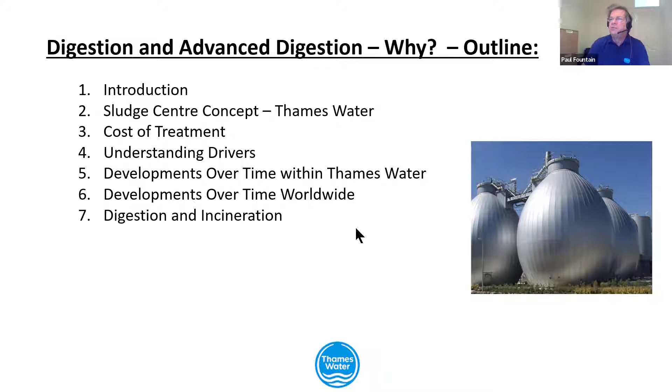We are in the United Kingdom, and a little bit about the United Kingdom. The United Kingdom was divided up into river basins, effectively. And so Thames Water are this river basin down here, which is the London region. All of the water that flows into the Thames River is in our area. There are 13 areas around the United Kingdom. We serve about 15 million customers in both water supply and sewage treatment, like you do. We have 350 sewage treatment plants. Many of them are very small.

And the very small ones then send their biosolids, their sludge, into 30 sludge treatment centers where we treat and process all of the sludge. We treat just over 1,000 dry tons of sludge a day, most of it going to digestion, but a small amount of it going to incineration as well. And last year, we generated 313 gigawatt hours of electricity, plus useful heat. This year, it's more like 350 gigawatt hours. We're the largest producer of renewable energy in the London area.

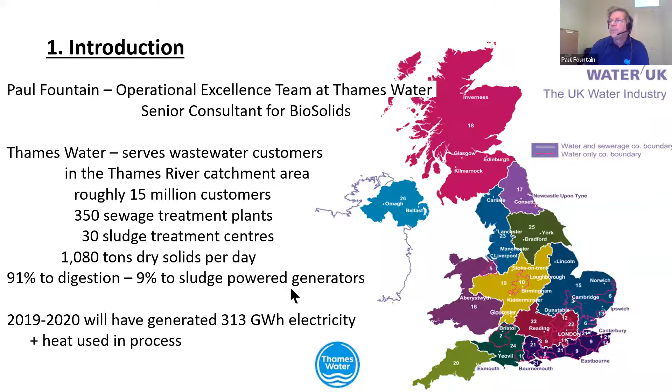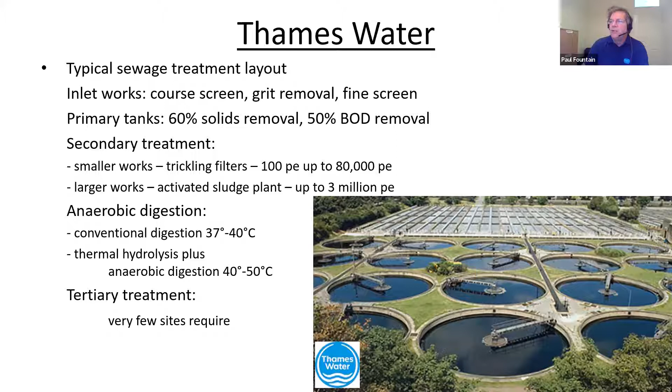Most of our treatment plants have coarse screen inlet works, grit removal, fine screens, followed by primary tanks. We think primary tanks are a very good way to do things because the quality of primary sludge is much better than secondary sludge. On smaller treatment works, we would follow that with trickling filters. On large treatment works, we follow that with activated sludge. This is a picture of Mogden, which is our second largest sewage treatment plant. And then we generally follow that by anaerobic digestion and then tertiary treatment where it's required. Not many sites have tertiary treatment, but where it is specific, then we do tertiary treatment. So a little bit about our sludge treatment concept, how we manage sludge sites.

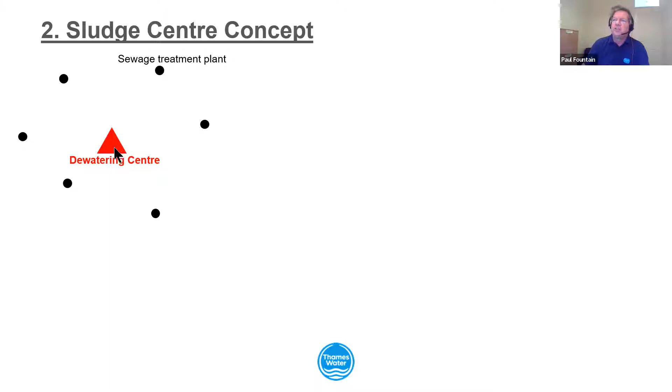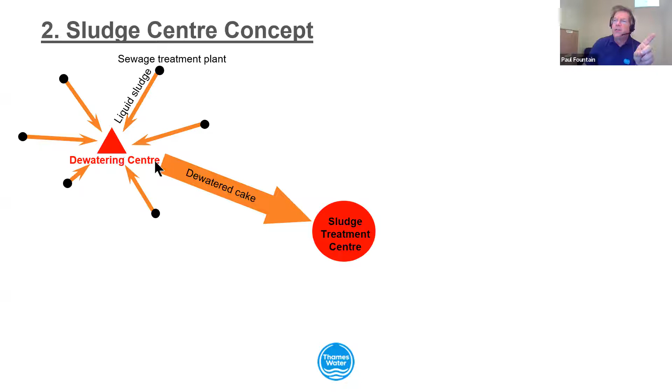So we will have a series of small treatment works that will send their sludge into a dewatering center. They will send it as liquid sludge, tanker it in into the dewatering center. From there, it's dewatered and is sent as cake to a centralized sludge treatment center. So out here, you just have the dewatering, and then in here, you have the sludge treatment. And there may be multiple of these around that are sending in cake, but you can also have liquid coming in from the more

local sites. Transporting sludge is a very expensive operation. So you want to reduce the amount of water in it so that you can transport it more economically. And then the digested cake, the treated cake, we recycle the majority of it. We recycle back to farmers' fields, not exclusively. We'll talk about that in a little while.

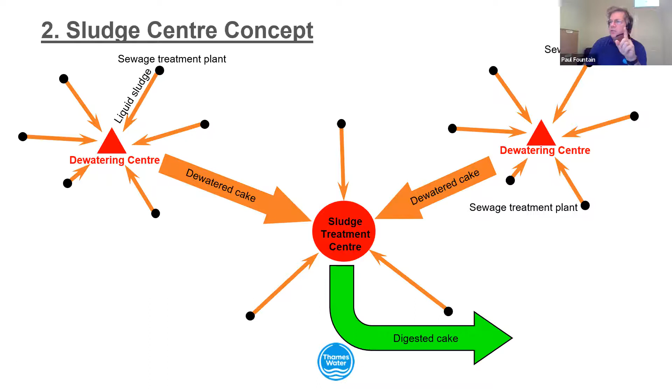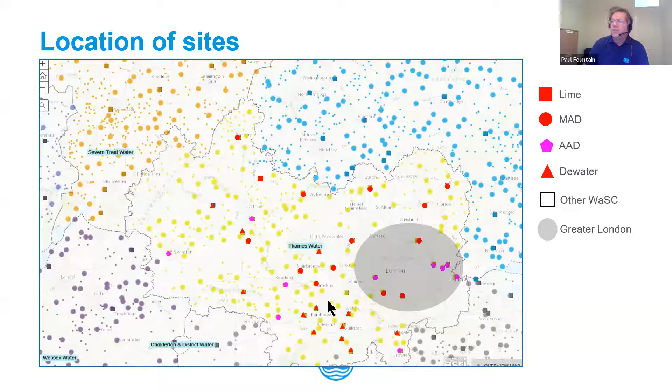So here, all of the very small dots are our satellite sites, and then the triangles are the dewatering centers, and then the red dots. So they're distributed all over. This is the London area where we have some particularly large digestion sites, and then these are the ones spread through the rest of the provinces. So we have a whole network of sludge treatment.

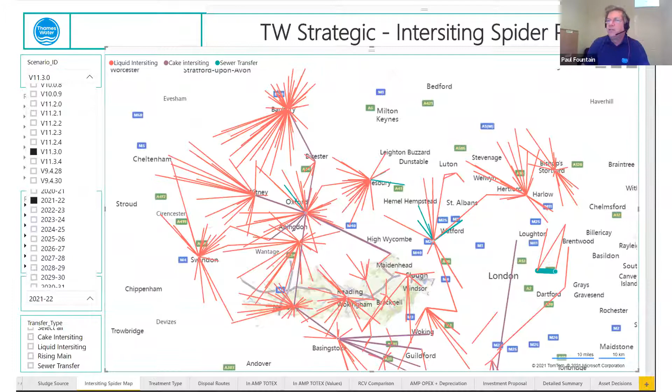So at a sludge treatment center, Basingstoke is our newest sludge treatment center. We have the facility for liquid sludge coming in from the area. We have processing for the indigenous sludge from the site. All of that then feeds pre-THP dewatering. We have a cake silo where our indigenous cake, the liquid imports are all dewatered and go into there, but

we also have a cake import facility over here where trucks can bring cake in, where it is processed in THP, thermal hydrolysis. We pressure cook the sludge so that it digests better and produces more gas. The digesters, you'll see in a minute, they're just behind me.

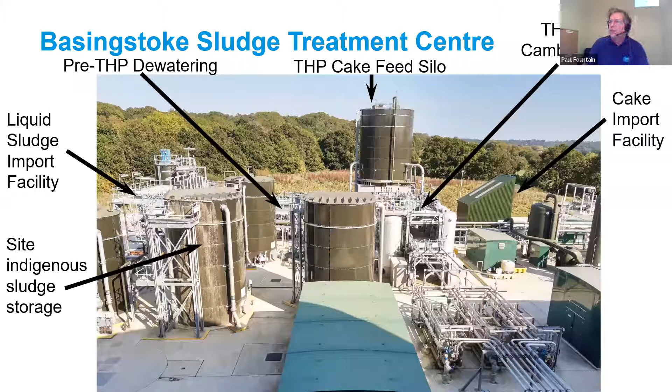So here is the sludge treatment center. This is the main sewage treatment plant, the inlet, the primary tanks, the activated sludge plant, the final tanks. And then everything is sent over for digestion. These three are the digesters. Then we have a dewatering building, and a liquor treatment plant before the liquors are sent back to the treatment

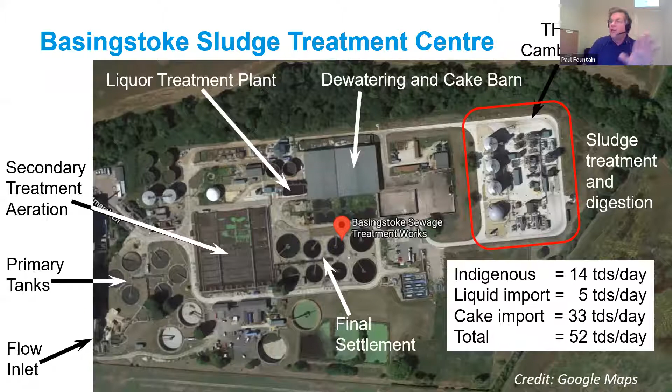works. Indigenous sludge is about 14 ton a day. The liquid imports are about 5 ton dry solids per day, and imported cake, the majority is coming in as cake, is about 33 ton a day, giving us a total just over 50 ton a day. This is not at all one of our larger sites, but it is a new site and quite well laid out, so it makes a very good example.

As we zoom in, you can see here's our liquid imports coming in. These are the pre-THP dewatering belts going in. This is cake import coming in, THP, and then our 3 digesters. This is for storing the biogas, which is then burned in the engines to produce electricity. From Basingstoke, we produce all of our own electricity, plus we export electricity to the network.

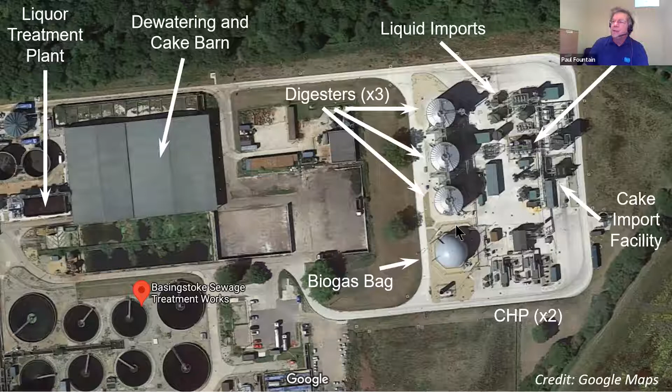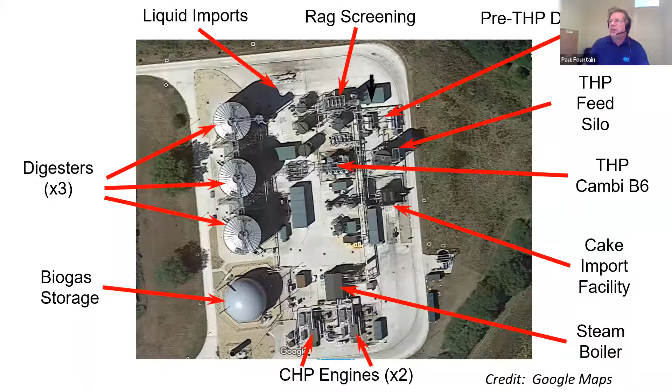And then the digested sludge is dewatered over here, and this is our liquor treatment plant. This is it, just highlighting some of the detail that we've already talked about for you. This is the final product. We are very proud of our final product. Our aspiration is to make the best quality fertilizer that we can, that farmers will like.

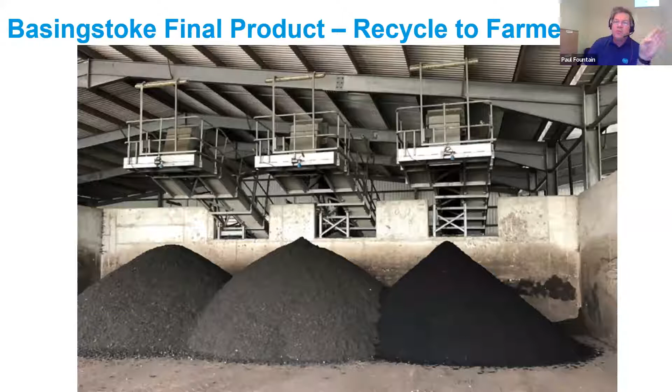And farmers, while they have access to chemical fertilizers, they appreciate the organic content that we can provide them. It makes an extremely good quality fertilizer, and having been through advanced digestion, it's very low odor and makes a very stackable product. And we have farmers fighting for this and farmers paying money for this, where they wouldn't pay money for our traditional products, they will pay money for this product.

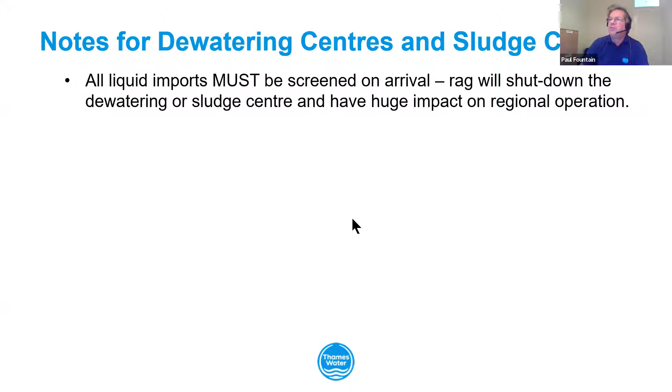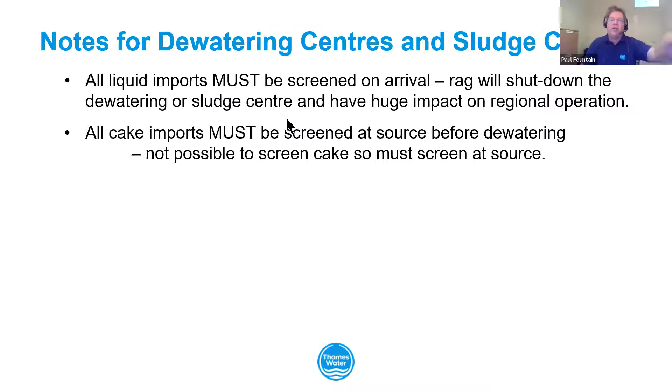A few notes about dewatering centers. Rag is the enemy of sludge treatment. It is a real problem, and it's very difficult to treat it once it gets to site. So what you really want to do is make sure that all sludge is screened before it arrives on site. Well, cake needs to be screened before it arrives on site. Liquid sludges must be screened as soon as they arrive on site, because you don't want rag shutting down your whole system.

When you're looking at a sludge center, you need to think about the effluent stream. Typically, an effluent stream is sized for its sludge stream, but when you make it an import center, you have a lot more liquors going back to the works. So you just need to think about where you've got the capacity to do that. It makes no sense to build a large sludge treatment center if you don't have the effluent capacity to go with it. So you need to think about that one.

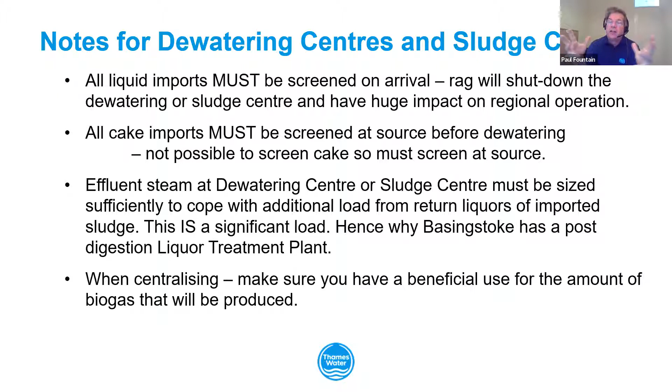You also need to think about location and overly centralizing. In the UK, the value of what we pay to buy electricity is very different than what we sell electricity for. So the electricity we use on site has a value of about 15 pence a kilowatt to us. The electricity we sell is only worth about 4 pence a kilowatt. So we want to centralize enough to generate all our own power, but not to export power.

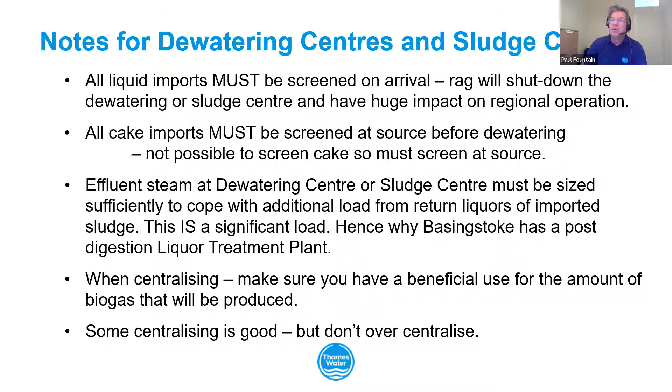Or if we're going to make biomethane, which increasingly now we're doing, we would only do it at a sludge center that is near a gas main where we can put it into there. Or if we're going to use it for vehicle fuel, that it's near a transport hub or a bus hub where we can easily provide that fuel to those users. Some centralizing is good, but don't over centralize, has been our experience.

The other thing as an operator, the things that matter to me as an operator, my system must be robust. We have probably 20 large water treatment plants, probably 50 in total. And when one of them breaks, I can take a tanker from another site to provide water for those customers. You can put a tanker in the middle of the street, people come, they get their water, they go home.

With sewage treatment, you can't do that. And the importance of having reliability of a sewage treatment plant absolutely matters. People do not stop contributing to your sewer system. So you must have a robust and reliable system. But you also want it to be cost effective. And the truth is, for many years, we didn't even look at cost effective. But the more we look at cost effective, the more we have begun to realize that using smarter ways of doing things, you can significantly change your cost of treatment. And we'll talk about that in a little while, because getting the economics right does matter.

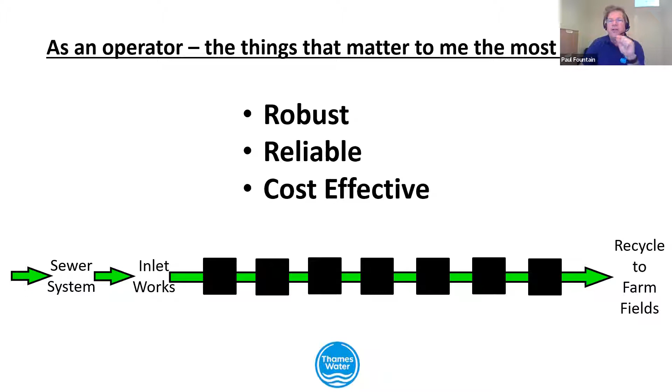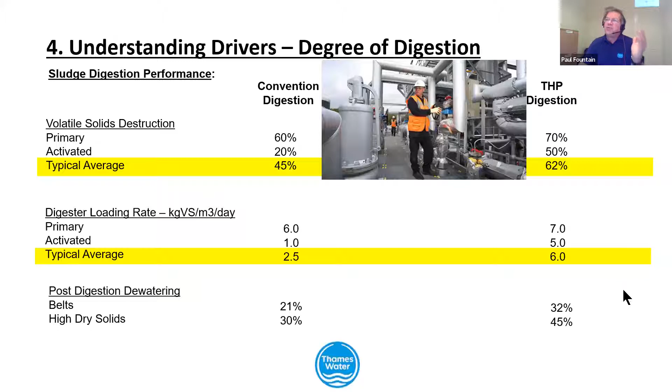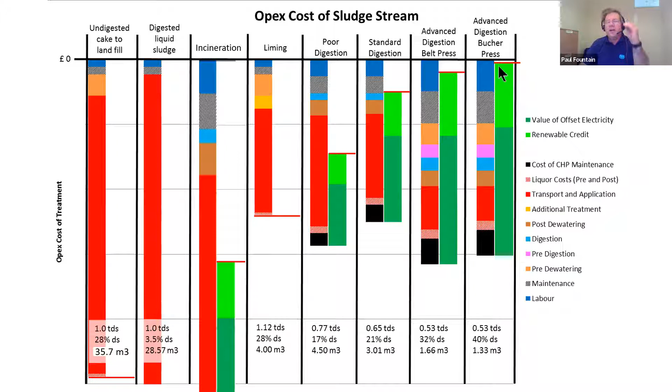So with conventional digestion, we loaded about 2.5 kilos of organic matter per meter cube per day. Advanced digestion, we can load at 6 or 7. Much better. But also, we get much better dewaterability. My final product going to land has less water in it, so therefore it costs less to transport. And you can see a big step up, which is what's pushed us to going to advanced digestion, from here, up to here, up to here, up to here, and giving us better economics in our digestion process.

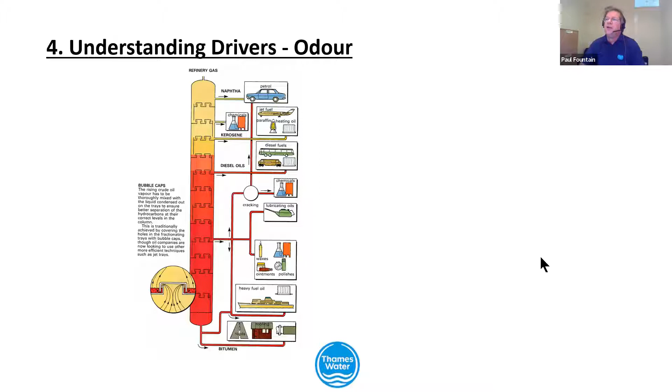Now, one of the big things that people will talk about is odor. And in my view, it's a similar process to an oil refinery. So in an oil refinery, I have my heavies and my mediums and my lights. So these are your tars and your heavy fuels. Up here is your petroleums and your jet fuels. The same with organics. The heavy organics, they don't smell at all. It's these very light volatile organics that are odorous, which is why your inlet works smell.

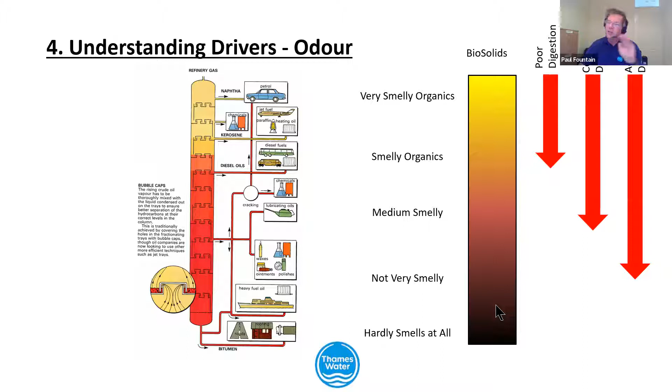So what I want to do is make sure I'm treating all of these. And poor digestion only treats the top end. The more you digest, and by the time you get to advanced digestion, you've consumed all of these organics, and you're only left with these very heavy, non-smelly ones that are not a problem. You still have organics to recycle to land, but they're not your light odorous organics to go to land.

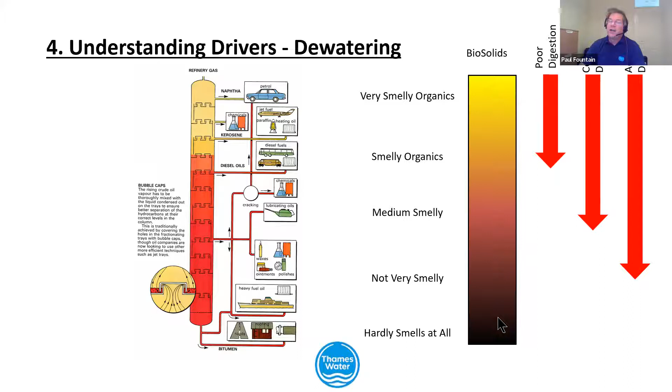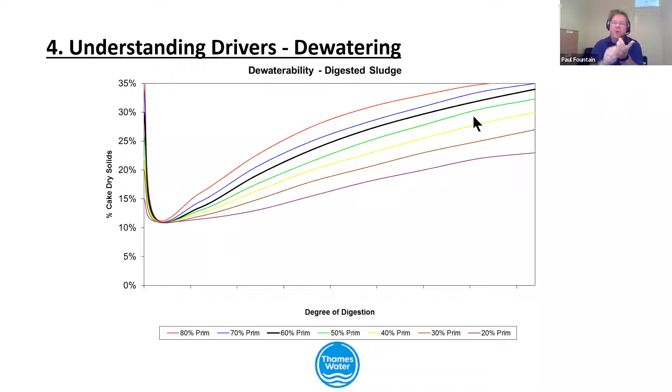The same is absolutely true with dewatering. It's these organics that don't dewater well. Those organics dewater very well. And this, again, based on data from what we found, initially sludge dewaters very well. As soon as you put it into a digester, it dewaters very poorly. But the more you digest it, because it's not just about time, it's about degree of digestion, the better it dewaters. And so being able to push up to getting really good dry solids means it's more stackable, the farmers like it better, and I decrease my transport costs.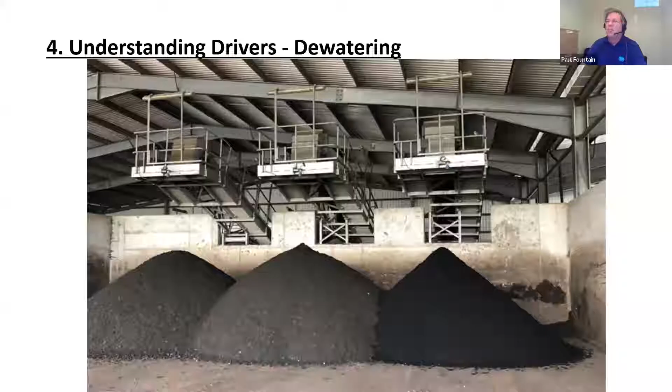And this is what I end up with. So the picture you saw earlier was from Basingstoke. This is from Oxford, a very high quality fertilizer that the farmers really, really like. Here's the Basingstoke picture again. Very similar product, a great favorite of the farmers. And I also end up with a clean filtrate going back to the works that puts less load on my effluent plant.

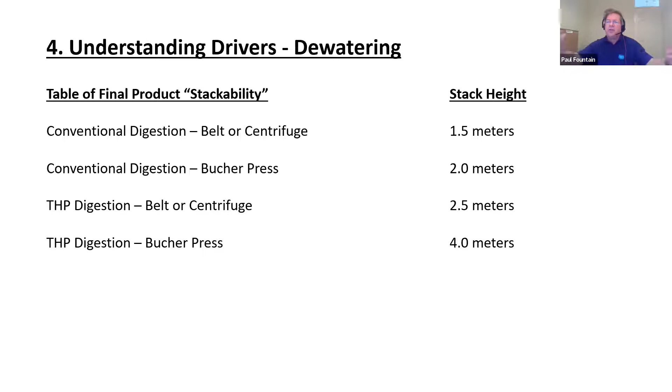A note on stackability, because particularly for our urban areas and because of spreading seasons for farmers, we can't get it out all the time. Conventional digestion doesn't stack as well, whereas with advanced digestion, I can stack to 2.5 to 4 meters high, which means I can stack in a much smaller footprint to store the cake before it can go to land.

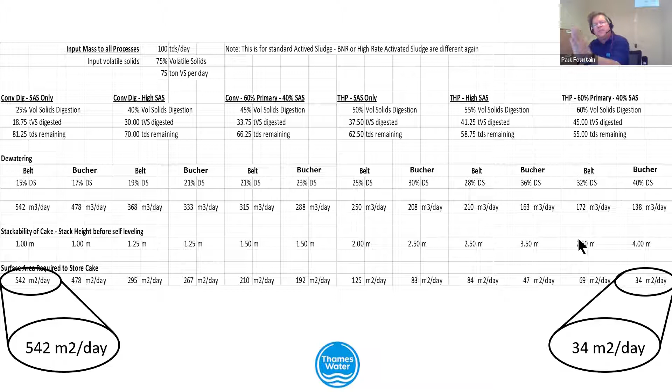When I then start looking at storage, this is just a simple spreadsheet looking at 100 tons a day and how much storage area I would need. Very poor digestion, I could need up to 540 meters squared per day. Very good digestion, I could need 34. That's massive when you're thinking about the capital you're going to need to build your area, which is why we want to push for as advanced digestion as possible, so it will store in as small an area as possible.

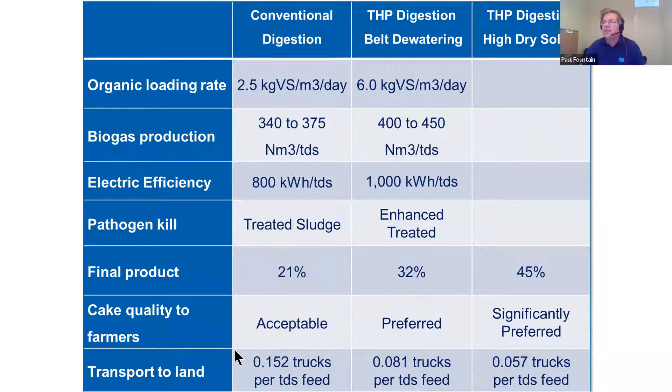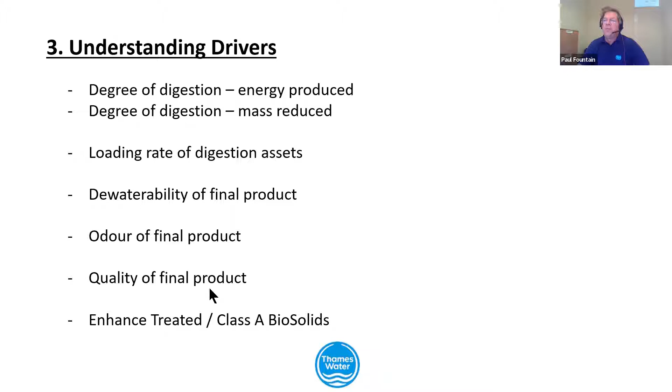So a third less trucks transporting to farmers' fields than from this technology, all hinging around how well I digested in the first place. And this is what shifts our economics and our end product. So all of these factors matter to produce a good quality product that will go to farmers' fields.

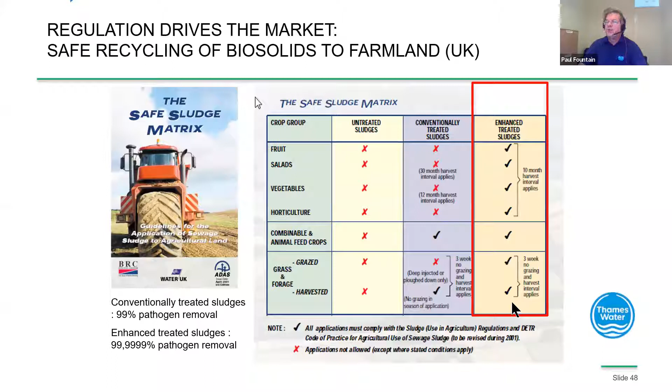In thinking about farmers' fields in the UK, we are regulated. So there's untreated sludges, which we can't do anything with anymore. There's conventionally treated sludges that can go to some crops, but not others. Or there is enhanced treated advanced digestion sludges, which we can put on all different crops. So that opens up the possibilities for us for a market.

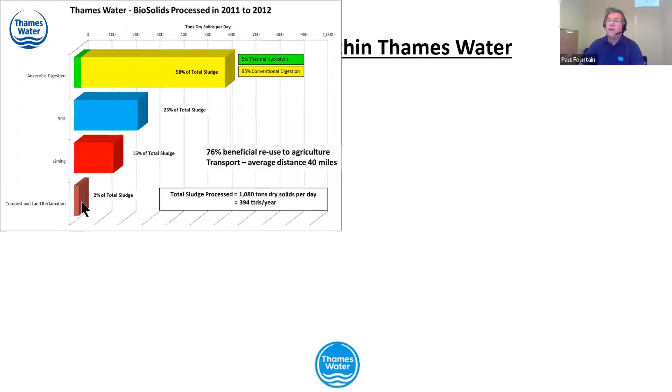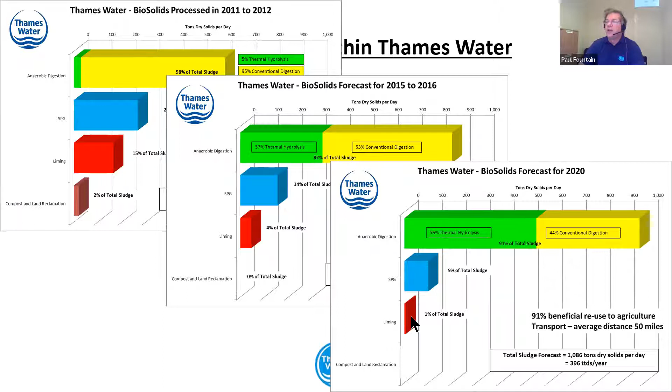And then this is now 5 or 6 years ago that had started to shift. And by now, the majority of our sludge is going to advanced digestion, still a fair bit to conventional digestion, a small amount going to incineration, and almost nothing going to liming and nothing going to composting anymore.

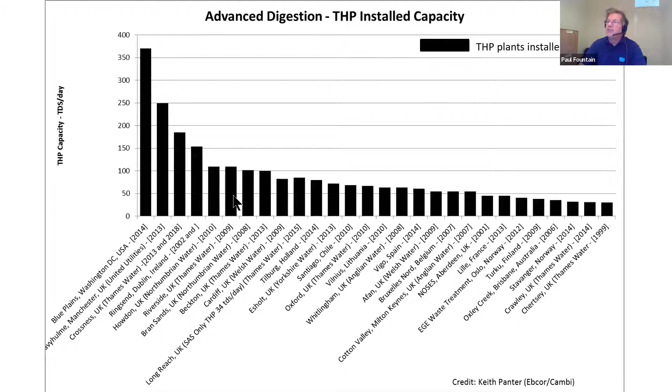Worldwide, these are all the advanced digestion sites around the world by their size. Washington, DC, I'm told there's a lot of poo in Washington, so... And when you look at the blue ones, these are all of the sites that are in the UK, and if I do the red, that's all of the sites that are in Thames Water. So Thames Water is one of the big players in this market because we've understood the economics of it, and that's what's driving us to go to advanced digestion.

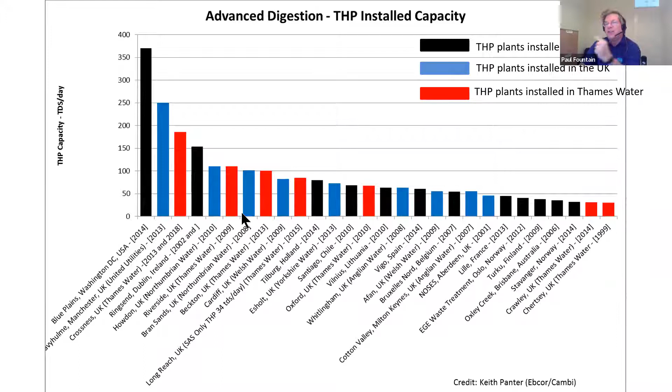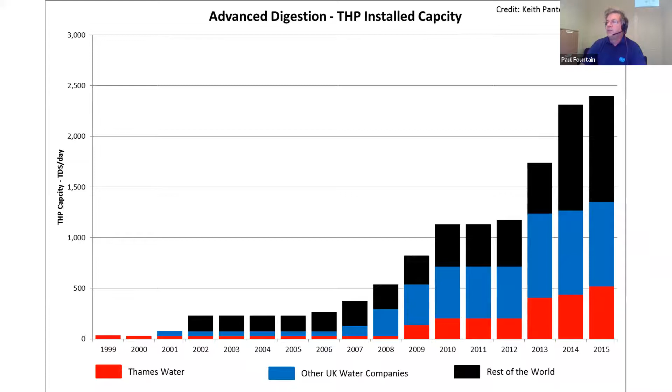This is the same graph, but showing over time the capacity of the different water companies. So this is the capacity of Thames. This is the capacity of all of the other water companies in the UK combined, and all of the companies in the world. So you can see that we're a quarter of the world's advanced digestion process. And it's what is enabling us to be robust, reliable, and cost effective.

Now, a few comments about various technologies. We have tried all of these different technologies. Because we have so much sludge and we have so many sewage treatment plants, we've been able to try a lot of it. We've tried drying and composting, different kinds of composting, chemical stabilization, we've tried all of this. And what we come back to is the best way to go is anaerobic digestion, and the best way to go is advanced digestion, effectively thermal hydrolysis, looking at different combinations.

And what I would say is historically, when we built our incinerators 20 years ago, we thought there was a trade-off. You either chose to go incineration or you chose to go digestion. What we would now say is that we would always go to digestion first, and then, if we can go to land, we will, because we believe that it's good for those organics to go back to the land. But if we can't go to land, we will then incinerate, but we will incinerate digested sludge, not raw sludge, because that's a much better way to recover energy and to be cost effective.

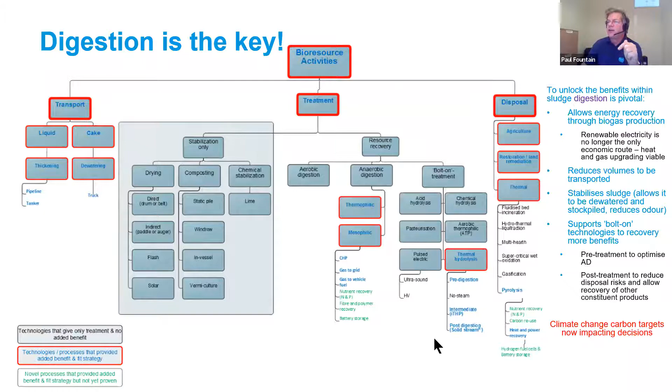If I can just tell you a little bit of that story. This is one of our incinerators. We have 2 incinerators in London. This is looking at 1 ton of sludge coming to be incinerated. Now, if I put it as liquid sludge, I have a huge volume. I'll get my 750 kilowatt hours per ton dry solid, but I have a huge volume. And most of that is liquid. And all of that liquid has to be evaporated, which consumes a huge amount of energy.

If I can make it cake and get rid of a lot of that liquid, I can get it up to 25% dry solids. That's very helpful because I've dropped now to 3 meters cube of liquid per ton of sludge. But that's still a lot of liquid. If I digest it first, I don't do anything else, I just do conventional digestion. Now the thing shifts, and instead of 3 meters cube of water, I only have 2.4 meters cube of water. So my incinerator works better.

And now if I go to advanced digestion, I drop to 1.1, I drop to 0.8 meters cube of water per ton dry solid. And the whole incineration process starts singing much better. And I get energy production out on my digestion plant. I get energy production on my incinerator, and I effectively double the amount of electricity I produce.

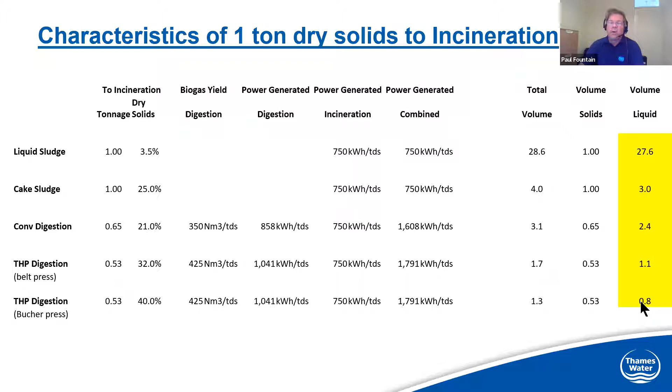And for Thames, this is our future. This is where we're going. Where we can go back to land, we will, because that's important for society. But where we can't, and we are required to incinerate, or we need to incinerate, or if we were to have contaminated sludge. Now in the UK, we don't have contaminated sludges, but if there were an application where we did, I would always recommend digesting first and then incinerating, simply because there's less water associated with that sludge. So the whole process works more efficiently.

Here's an example. This is raw sludge, its calorific value, the amount of moisture in it, because all that moisture has to be evaporated off. So this is the heat required to evaporate, and this is the net left to the incinerator. When I bring in digested sludge, it has less calorific value, but because it's much drier, I end up with the same net. But actually, historically, we've found not only is it drier, but it burns better. So we get a significant increase in our production from that cake. So I get benefit out there and I get benefit here, and the whole thing just works an awful lot better.

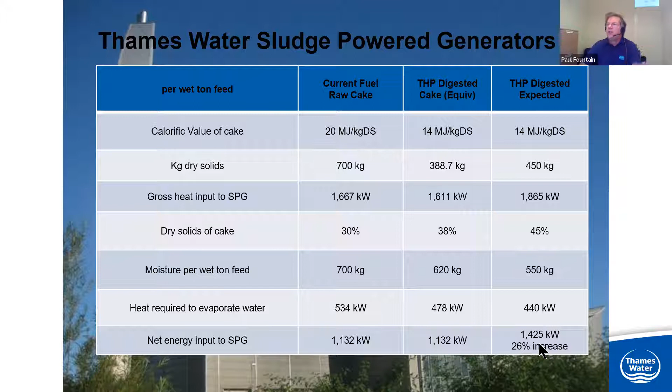One other comment for you, just to share our learning. Our incinerators are fluidized bed incinerators. They work well. They're expensive, but they work well. We have sludge and air coming in. We have to recycle a bit of heat back, which gives us our thermal input that comes up through a fluidized bed. We balance with gas to keep the temperatures controlled. That comes in. But because the air leaving also has to have some heat in it, it has to be at least above 105 degrees C.

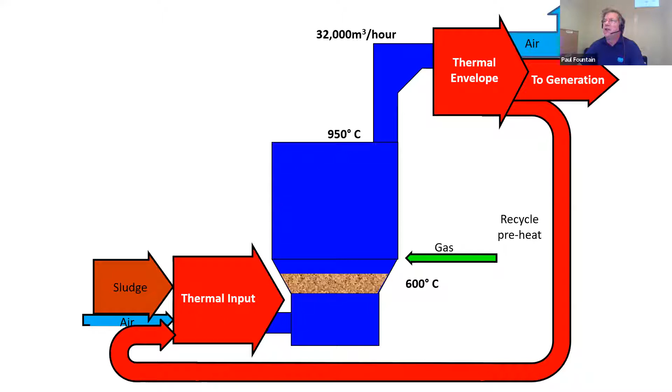I lose a lot of my heat to my airstream. So some of my heat is going back to my recycle, some of my heat is going to my airstream, and it's not very efficient in what goes to generation. It's efficient in thermally combusting the sludge, but it's not efficient in generating electricity. So therefore, we're looking at going to gasification and pyrolysis, what we call advanced energy recovery.

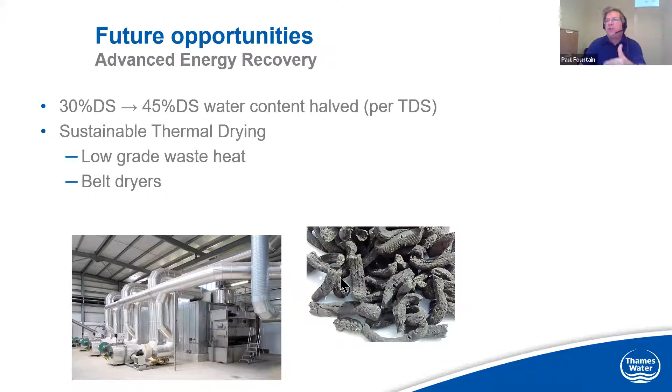Because the cake coming out of THP is already so dry, we can use low temperature belt dryers, and we can then go to pyrolysis, which unlocks even more energy because it's more efficient, because it doesn't have the air treatment process that a fluidized bed incinerator has. It uses combustion without air. Then we get much more electrical efficiency out of it, much more energy production out of it. And one of these plants has been built in East London at Crossness, and it will be going into production shortly.

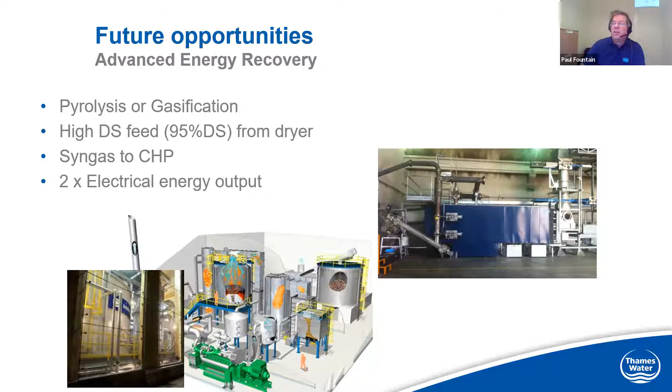So that's the end of my presentation. Thank you. And I pass it back to others, and we'll take questions a bit later.

Thank you, Paul, for sharing this wonderful presentation. As I said, the intention of this platform is for knowledge share between utilities. So it's great to see the work that's happened at Thames. I would now like to invite Sanmit Ahuja, Independent Board Member Expert from C-Ganga, to share his views before we go and open it up to discussions. Just a point, if anybody wants to ask any questions, they could raise their hand or put it in the Q&A box, and I will ask my technical person to allow you to speak so that you can ask the question directly. So first, over to you, Sanmit.

Thank you, Kailash, and thanks to Paul for a very comprehensive presentation. My name is Sanmit Ahuja. I am a board member, or expert member as we call it in India, at C-Ganga, which is a think tank and innovation agency under the Ministry of Jal Shakti and operated under the aegis of the National Mission for Clean Ganga. C-Ganga is a collective of 40 plus institutions of national eminence, and it is headquartered and led by IIT Kanpur. Its role is to develop the master plan for the Ganga River Basin, to continuously evolve it, to develop data and information platforms, to bring new innovations to market. And innovations is not just technology, it's also in policy innovations, it's also in financial modeling.

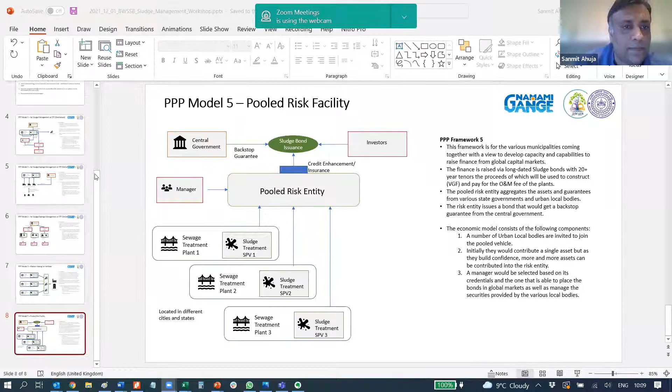I wasn't planning on showing some slides, but I thought just to bring some perspective, I will try and do that. So Kailash, if your team can allow me to show the slides. Yes, Ram, can you give screen sharing, please? It's done. Okay. I'm not seeing the option. You can click on share screen at the bottom. There should be a green button at the bottom of your screen that says screen share. I've done that, but it doesn't then bring up the options. It's just showing me select your screen or select the whiteboard. Let's see if this works. Yeah, that worked? Okay, good, lovely.

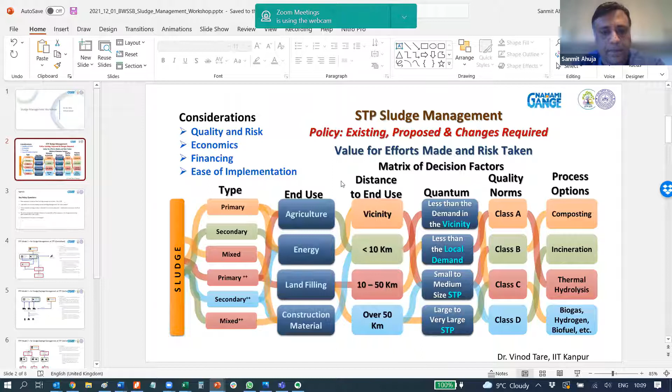So when we looked at sludge management, ultimately, how do you create the right economic framework? Many cities are kind of confused, as we realized. We've spoken to more than 20 municipalities, large and small, and ultimately the economic drivers are a function of what we are trying to achieve. Paul mentioned that increasingly cost management is becoming a big function. Of course, that is a primary function in India, but managing environmental costs also requires internalizing those environmental costs. And we don't yet have a robust economic framework in India to manage those environmental costs.

The moment we start internalizing, the capital cost of setting up the plant and operating the plant, of course, increases. But who is funding that? If it is being funded largely by the government, then the demand on capital goes through the roof. If it's funded largely through market drivers, so in effect, sustaining the cost through electricity production, gas production, or fertilizer production, then we have to create those market fundamentals to support sludge management. So this slide will give you a good sense of how we are going about understanding how to deploy sludge management in the country.

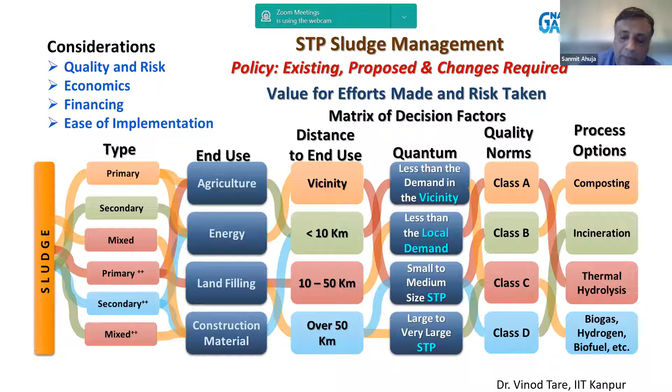And then finally, the quality norms, whether you're going for Class A or not, is a question mark that all the regulators are trying to answer at the moment. But ultimately, it's the economic drivers, driven by what we are trying to achieve, that will deliver that answer. If we want 100% wastewater treatment and zero footprint, then we'll have to go for a combination of all of these processes, particularly the ones that Paul mentioned. And we should learn from the experiences of major players, utilities such as Thames Water.

So when we looked at the economics of sludge treatment, we don't yet have figures. In fact, we are starting a study where we're trying to look at half a dozen major cities of all shapes and sizes, large and small, and developing a sludge master plan for each one of them. And the sludge master plan will depend on the parameters that I showed in the slides before.

And once we are able to understand how much sludge is being generated in the city on a daily basis, at what points it is being generated and collected, how many wastewater treatment centers you already have, and which ones of those could actually act as centralized sludge management facilities, only then will we be able to come up with an economic framework and a financial framework: what is the cost to set up the plant and what is the cost of operating the plant.

The government is not averse to providing what's called a VGF, a viability gap funding. I saw in Paul's slides where he showed the various OPEX costs. And if we move towards advanced treatment where we are digesting better, the operational cost does come down almost to a break-even level. If that is the case, then a one-off capital investment can be made by the government in the form of a viability gap funding, or even a hybrid annuity model, through which most of the projects in the Namami Gange program are actually being funded. So that is the framework that we are starting to study.

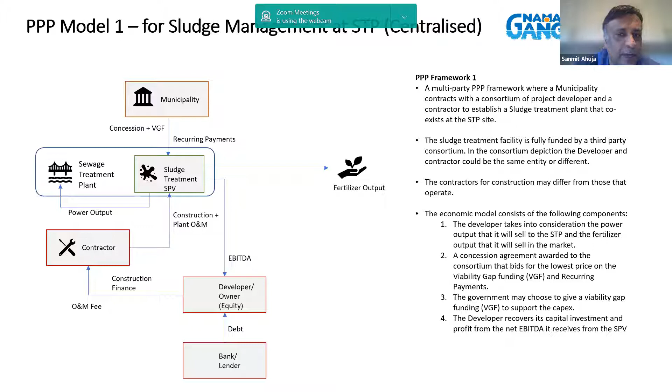I'll come to this slide later. The challenge for a lot of the municipalities is, okay, we are producing good quality biosolids for land application. We don't want that to go waste, but if we leave each utility, each municipality to their own devices, then it'll be very, very difficult for them to create a market for good quality biosolids. And if those fertilizers are created to a high standard and high spec, then there is, of course, a case to create a market. Now, as I said to you, fertilizers is a highly subsidized industry.

So we are also studying what are the price points at which the offtake becomes viable, looking also at the transportation and distribution costs. So we are in advanced discussions with a number of national fertilizer companies to create a large market. So essentially one or two major national fertilizer companies will collaborate with us and will offtake the fertilizer from different sludge treatment centers across the country. So that hopefully will create a market for the fertilizer.

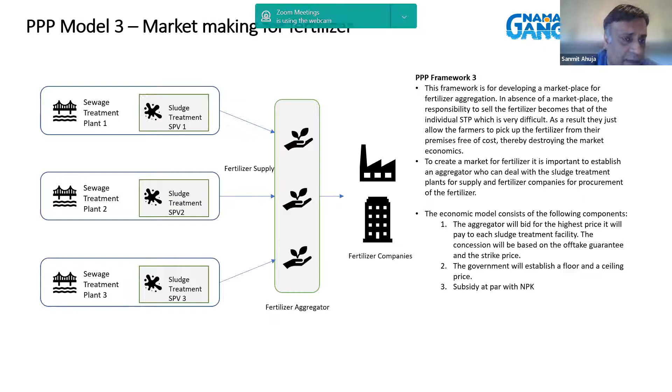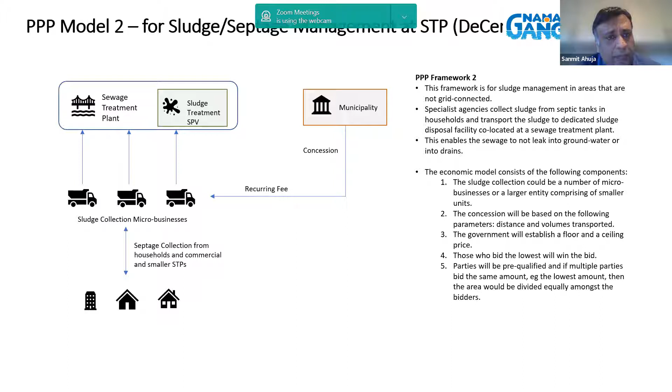There is also an additional element of fecal sludge in India, where septic tanks and other smaller generation points which are not connected to the grid are also a big cause of wastewater and sludge disposal into our river systems. And the idea is to create a decentralized operating framework where smaller contractors could be made available with advanced transportation vehicles and earmarked decentralized facilities, which could be the collection centers where the sludge would be transported to.

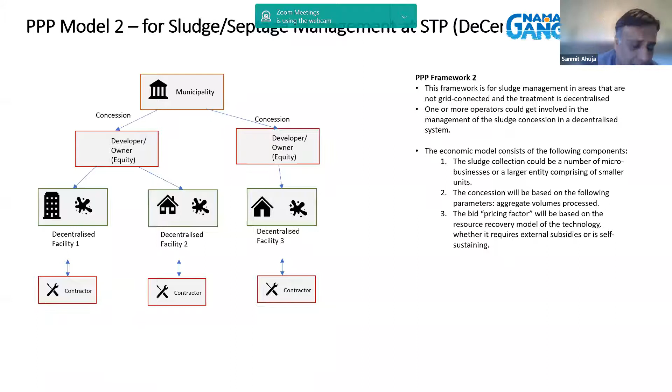And of course, we have to study the economics of it, and each city would have its own dynamics. So there is no one size fits all. Every city will have to understand how they develop their own sludge master plan, and that's a process we are starting now.

Finally, on the financing part of it, many utilities, advanced utilities, who are now seriously thinking of developing sludge treatment centers or integrating those in the new STPs that are coming up. We are working on developing a sludge bond, which would finance sludge development.

Essentially, there would be, at least in the Ganga Basin, but also we are developing with other government departments, a facility which would enable various municipalities across the country to pool their sludge treatment projects into a combined vehicle, what I call a pooled risk entity. That would get further credit enhancement through asset backing or government backing, and on the basis of that, we will be able to issue a bond.

So municipalities who are serious about sludge management and are currently finding themselves constrained in being able to finance the projects because of lack of funding, can come forward to us, and we will help them in raising finance from capital markets and green investors, both in India and around the world, so they can accelerate their sludge financing. So I think that's about it in my slide.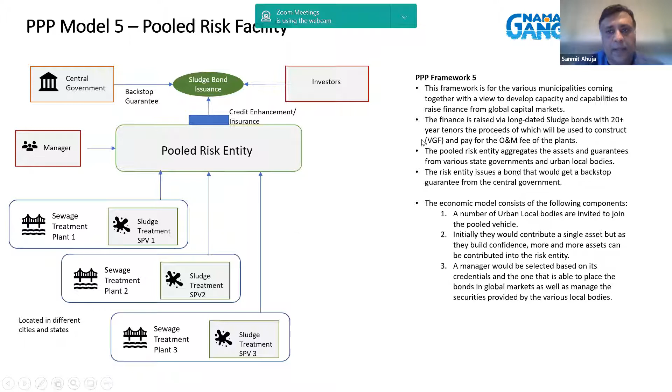So finally, what I would like to say is that there is no one size fits all answer on the financing and economics of sludge. We have to take the setting of each city, the quantum of sludge being produced, the locations where wastewater treatment centers are situated, the distance, the proximity to the farming community, the proximity to biogas off-takers, whether it's piping or injecting into the national grid, the city grid, or bottling biogas and supplying to commercial establishments. Each city would have its own set of characteristics.

And on the financing side, we would have a number of instruments available, from bonds to green insurance to other credit enhancement instruments. But the economics of sludge is a function of proximity, of technology, of markets, and the urban setting in terms of its size of population and the urban congestion. So, I guess I was able to convey some of the key messages on how the Government of India is thinking on managing sludge across the nation.